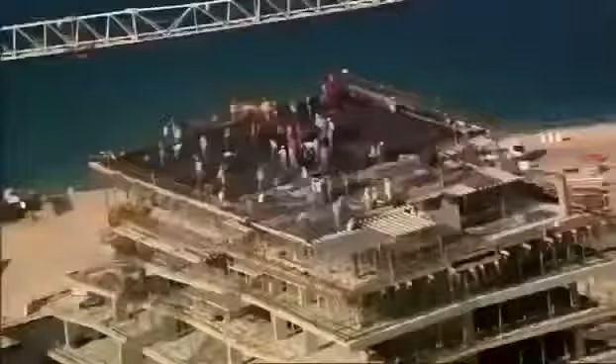Abu Dhabi, the richest city on the planet. It wants to join the City Super League and is undertaking an incredible transformation. Building this extraordinary skyscraper, Aldar HQ. Nothing like it has ever been attempted. It'll be a race against the clock. Will this megastructure push even Abu Dhabi to the limit?

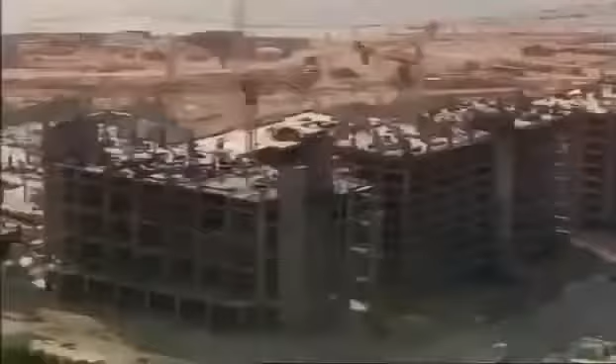Abu Dhabi is in the midst of a construction boom. It's the largest of 7 sheikdoms known as the United Arab Emirates. Its capital, also called Abu Dhabi, is the richest city on earth. Its ruler, Sheikh Khalifa, has a cool $875 billion in the bank and an audacious spending strategy to match. He wants to transform the skyline and compete with the international elite of London, New York, and Hong Kong.

But this is not the first time the Emirate has stood at the crossroads. Just decades ago, Abu Dhabi was a desert backwater, until the discovery of oil in 1958 brought unimaginable riches to its ruler, Sheikh Zayed. As the petrodollars flowed in, he converted the shell houses into high-rise, and the traditional way of life was swept away.

Today, Abu Dhabi is a thriving metropolis, sitting atop the world's 5th largest oil reserve. But black gold alone cannot put this city in the Super League. To do that, Sheikh Khalifa must lure big business and tourist dollars. Abu Dhabi must expand to thrive.

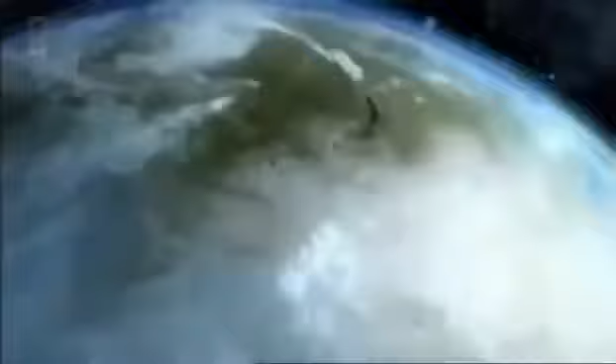To put Abu Dhabi on the world map, fledgling property developers Aldar plan a whole new micro-city, Al Raha Beach. It's an ambitious proposal. At 11 kilometers long and almost a kilometer wide, this city on the sea will be the biggest project ever attempted in Abu Dhabi's history. Mohammed Al Mubarak is in charge of delivering this audacious development. The vision of their highnesses and the vision of Aldar was to create this almost mini city where people can live, study, play, and work in one destination.

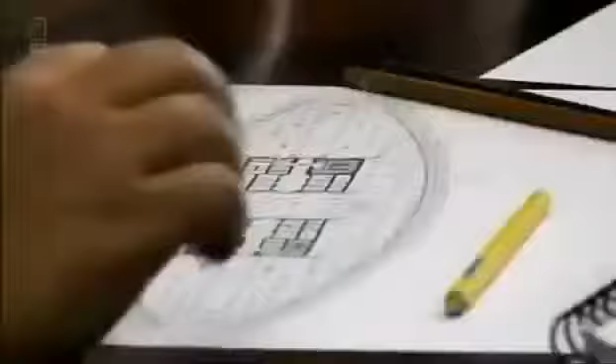Al Mubarak must attract investors if Al Raha Beach is to succeed. So to launch the project, he commissions a signature skyscraper. Creating an iconic structure on Al Raha Beach was of vast importance in basically putting Al Raha Beach on the world map. Al Mubarak sets Lebanese architect Marwan Zgheib the task of designing an icon that raises the stakes even higher. The building will become Aldar's headquarters in the heart of their colossal development.

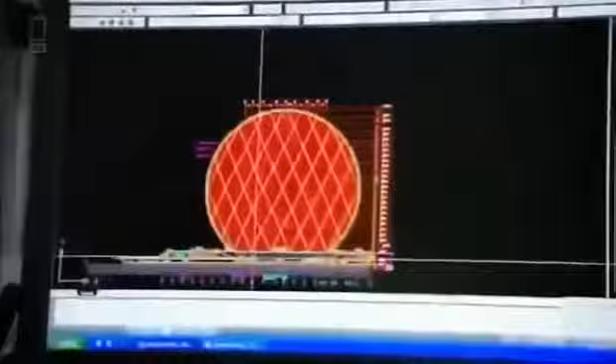But creating something new in a land where the iconic is the everyday won't be easy. Neighboring Emirate Dubai has taken center stage with a number of headline-hitting projects. The world's tallest skyscraper, Burj Khalifa, the Palm, and the World, and the emblematic Burj Al Arab. To stand out from the crowd, Zgheib knows he must redefine the extraordinary. Simple can be powerful sometimes, and especially in architecture. You can see it since the pyramids of Egypt. Most of the iconic buildings are very simple buildings.

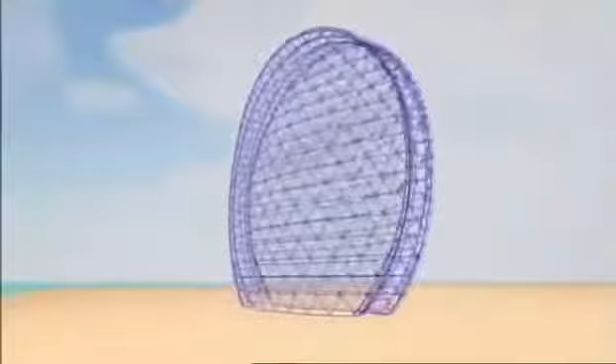But it isn't until Zgheib is relaxing on a plane that he has a brainwave. But I couldn't sleep, so it was a moment of relaxation, you know. And then the idea came simply. So I took a pen and I drew it on a sketchbook. The design is simple but daring. A round skyscraper taller than the Statue of Liberty, with a curved glass skin covering the area of 4 football fields. To be honest with you, the moment I imagined it, I knew it was a winning concept. I knew it was something different.

In fact, the design is so unusual, Al Mubarak initially doesn't know how to react. When I first looked at the MZ design, I was a bit confused in the beginning, to be honest with you. I felt like I was looking at a comic. I felt that this was a flying saucer and basically it landed on Al Raha Beach. And I just kept on staring at it for like another 15 minutes. And after 15 minutes, I just fell in love with it.

Zgheib's design is inspired by nature. 2 giant circular curved walls of glass mirror an open clamshell. Architecture is nothing but imitation of nature. At the beginning, the idea was so geometrical, very pure. It's like a seashell. The seashell has deep meaning for Abu Dhabi with its seafaring heritage.

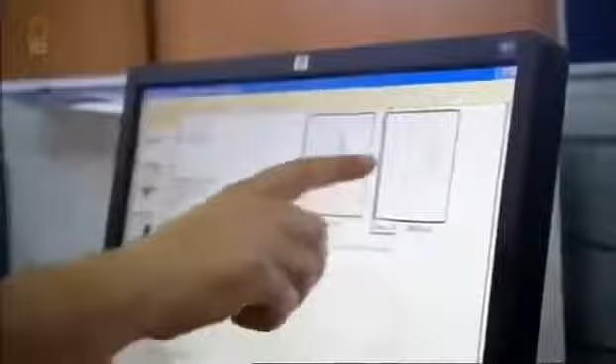But a circular design poses a problem. Just like a coin that stands on its edge, it risks being unstable. The circle must be balanced. So Zgheib turns to some very old-school geometry. The real challenge of the circular facade was to find the 2 points where the building should pose on the ground. And for that, I had to go back to one of the oldest rules in architecture, proportion. When you have a circle, you can divide it into a pentagram.

And that pentagram, in fact, is a representation of the cosmic body of the human being. So you can put a man in that pentagram, the man and the universe. So the pentagram will define the 2 points of the circle where the facade will lay on the ground. And this will create the perfect balance.

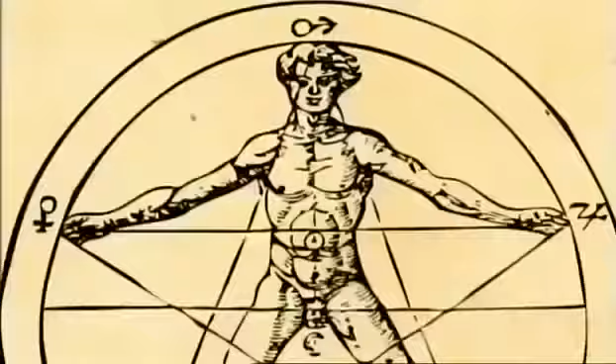It was the same thinking that led 16th century philosopher Heinrich Agrippa to draw man as a pentagram inside a circle, and has helped architects to proportion buildings for centuries. But it's not the skyscraper itself that poses the first major challenge. It's the proposed site. They wanted to show me the site, but all you can see was the sea, nothing but the water.

Unbelievably, the solid ground required for Aldar HQ does not yet exist. The desired location is 700 meters out in the Persian Gulf and 8 meters underwater. New land must be created. Over 3 million cubic meters of sand must be found. Surely a simple task with Abu Dhabi's endless desert dunes. But desert sands are too fine to build with. The land would just slide into the sea. Marine sand is needed. Its larger grains help it stick together, creating the perfect base to build on.

Dredging sand from the seabed is one solution, but fortunately, the late sheikh has already done the job for them. Whilst cutting a shipping channel in the late 1970s, Sheikh Zayed created an island of discarded sand. Luckily for the engineers, it's just across the water, so they decide to move all 20 million cubic meters of it.

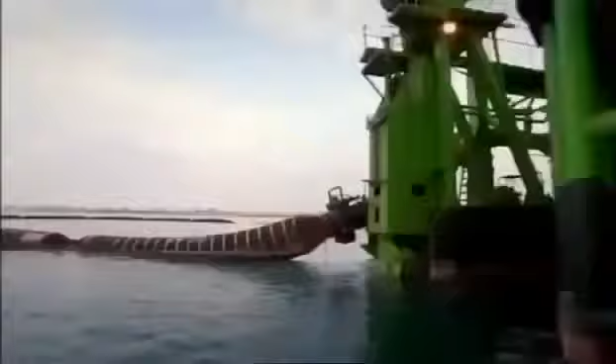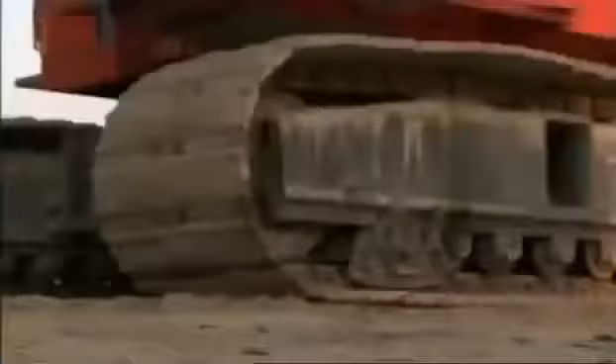A fleet of cutter dredgers eat their way into the island. These are no ordinary dredgers. It takes an enormous claw layered with 48 reinforced steel teeth to slice through the hardened sand. The sand is pumped through a floating pipe to the construction site. Here, excavators toil 24 hours a day to flatten the virgin ground. After 8 months, the land for Aldar HQ is fully formed, and with this, the first major problem overcome.

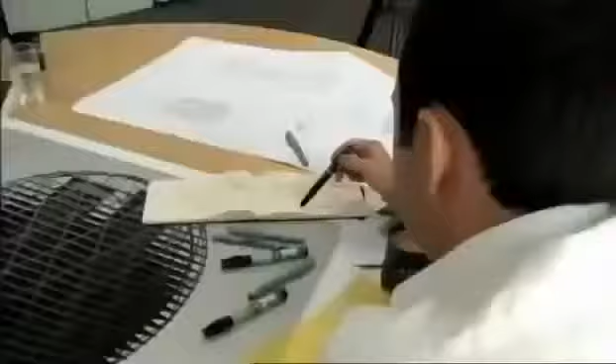Aldar want their skyscraper completed by an astonishing deadline. In just 30 months' time, the eyes of the world will be on Abu Dhabi when it hosts its first Formula One Grand Prix. The racetrack will be on its own designated island, complete with hotels and theme parks. And Aldar are building the lot. The international press and tens of thousands of visitors will descend on the city. It's the ideal opportunity for Aldar to showcase their new HQ. But to stand any chance of meeting this target, the team will have to pull out all the stops.

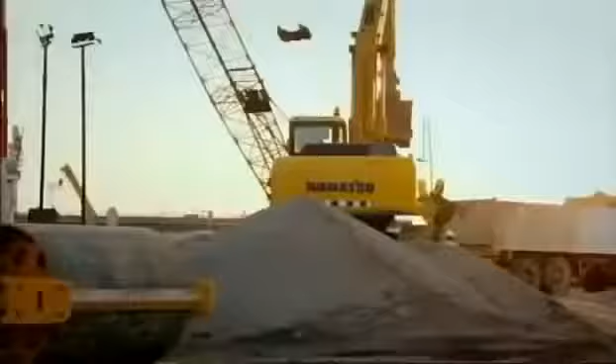Just 1 month after design has started on Abu Dhabi's round skyscraper, the construction team arrive on site to begin foundation works. For construction manager Miles O'Sullivan, the schedule is a shock. With the design not complete and being told you're going to pile in 1 month, almost crazy. But it's not just the first deadline O'Sullivan has to worry about. Aldar HQ's round curved shape presents an enormous sail-like area when wind strikes. Wind tunnel tests must be done to prove the foundations can take the strain. But the results won't be back until work has already started.

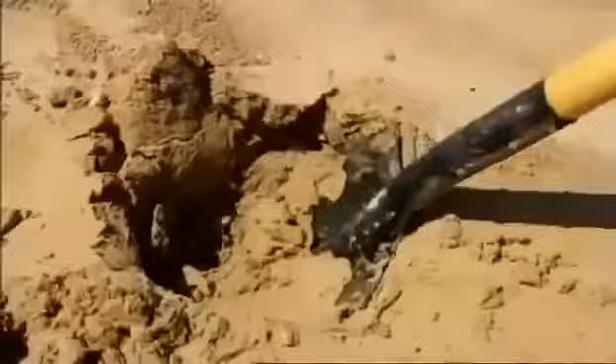Abu Dhabi is regularly hit by high-pressure winds that sweep in from the Persian Gulf. But building Aldar HQ so close to the sea will put the foundations under another kind of pressure. Digging for Aldar HQ is very similar to digging here in the sand. As you dig down, you'll get to see the groundwater starting to surge through the sand. And in fact, it's that groundwater coming through the sand here that's creating the pressure and obviously creating the issues for us when we do the construction. The upward pressure of the water and the loose sand pose a problem for foundation construction.

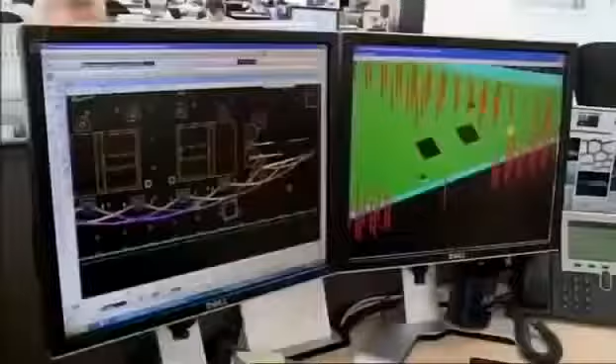Before excavation can begin, the team must build a solid barrier called a diaphragm wall or D-wall. It's a concrete barricade formed of interlocking panels which socket into the bedrock and reach 16 meters below the surface. The D-wall holds back the loose sand and the surging seawater, ensuring the ground inside the barrier can be removed. These areas here, what are these? Sumps. The D-wall must be built before the foundations can be laid. But with the blueprint still a work in progress, the team can only hope that over-engineering the foundations will make them strong enough.

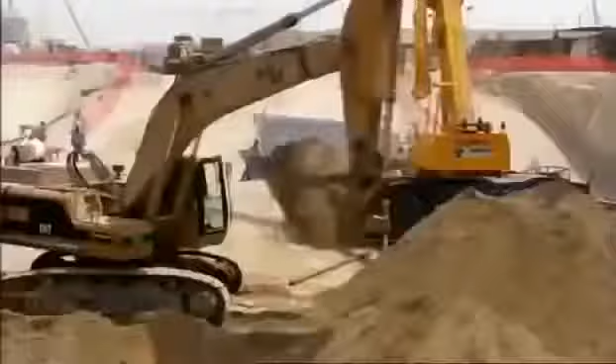The design calls for about 400 concrete piles that work in two ways. Half of the piles rely on friction with the ground to secure the structure to the rock and sand below, whilst the remaining piles drive deeper into the rock to dissipate the building's immense loads into the ground. On site, D-wall construction begins. It's the same process ongoing at this Abu Dhabi construction site.

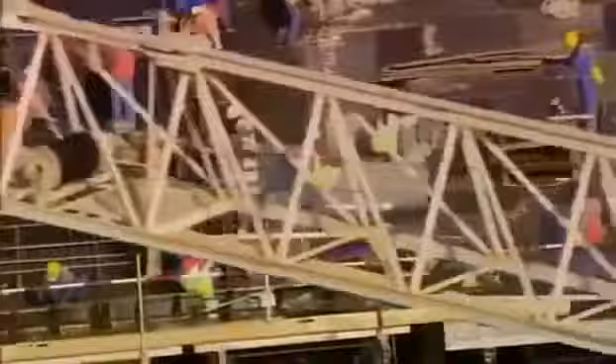Until recently, Al Raha Beach was just a vision for Aldar's Mohammed Al Mubarak, but the dream is slowly emerging from the sea. Seeing that land come up, seeing the amount of work and the amount of staff we had on the ground to make sure that was going to be done, that was like watching Rome being built.

The D-wall and concrete piles create a firm foundation upon which to build Aldar HQ. But the force of the sea pushing up through the sand still poses a threat to the skyscraper. A great way of demonstrating the problems we faced at Aldar HQ with the groundwater is in imagining that this bottle here is Aldar HQ.

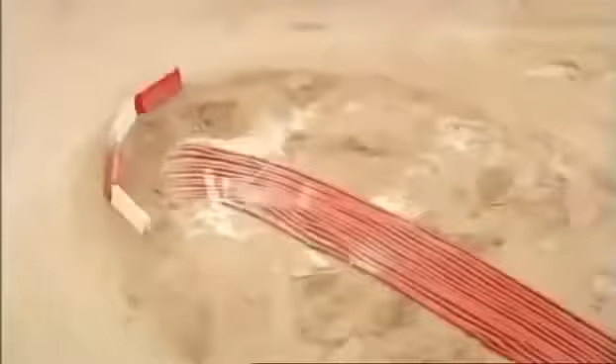And as I push the bottle down, you'll see forces are exerted on my hand. And in fact, that's the groundwater trying to push the building out, trying to push Aldar HQ out of the building site. To keep the site dry during construction, water is sucked out of the sand and pumped out to sea. But that's only a short-term solution. To protect this skyscraper in the long term, the team need an extra defense.

It's a giant slab of concrete called a raft. It creates a barrier against surging water, stops the piles from punching up through the building, and acts like a snowshoe to evenly distribute Aldar HQ's 59,000-ton weight into the ground. Raft construction for Aldar HQ is 12,000 cubic metres of concrete, which is a 30,000-ton structure. It's a huge element. With 2,000 truckloads of concrete to pour, it's a job that continues into the night.

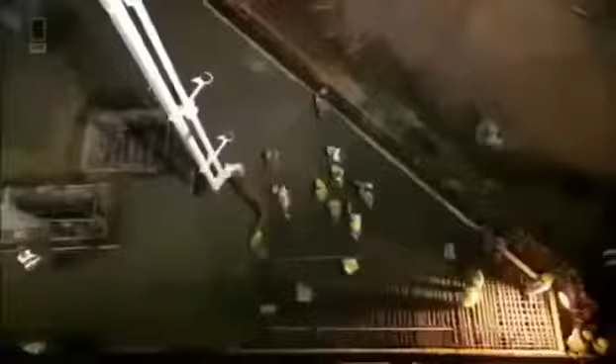But engineers are just getting to grips with the severe forces that will affect the piles. The unique shape of the skyscraper will capture wind like the sail of a yacht. There are no guarantees the foundations will be strong enough to cope with the loads. The advanced construction works had to commence so quickly that we didn't have time to do the wind tunnel test. It was important that we did one, primarily because this is a unique shaped building.

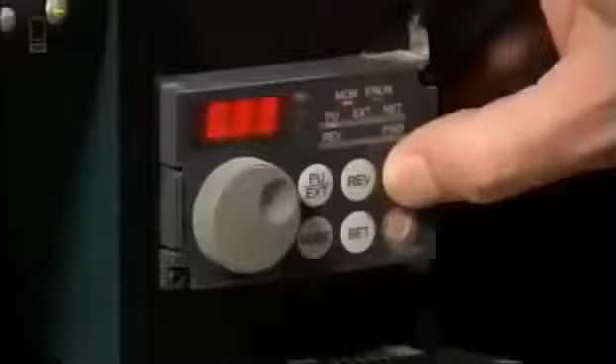Gibbons calls upon wind engineer Roy Denoon in Colorado, USA. He puts a scale model of the HQ through its paces in his high-tech wind tunnel. Right at the start, Craig Gibbons actually called me and said, "We've got something really unusual coming up. Can you take a look at it and give us your first best guess of what the wind loads might be? Give us some guidance on how to get to some loads for the foundations, because this is running on such a fast-track schedule."

Knowing that Gibbons is already building the foundations, Denoon wastes no time in firing up the fans. If the tests reveal the wind loads are higher than predicted, the foundations already in the ground may have to be redesigned. To be putting in the foundations before we could finish the wind tunnel testing, that always gives us a little bit of cause for concern. Denoon is right to be worried. He knows how high-altitude wind impacts on very tall rectangular skyscrapers. But Aldar HQ's lower height means another type of wind is the threat.

When we look at the really extreme wind speeds in the Middle East and in this region, we find that the highest, what we call gust wind speeds, the short events, are caused by thunderstorms. Abu Dhabi may appear sun-soaked, but during the spring, the intense sun heats the moist air, causing spectacular thunderstorms. Wind speeds can escalate up to 137 kilometers per hour.

The key issue with thunderstorms in this region is that they give the absolute highest gust wind speeds. Now, for the very, very tall buildings, that's not too critical because they occur down low. For Aldar HQ, they were really critical. Thunderstorm winds are strongest between 50 and 150 meters above ground. Aldar HQ is right in the danger zone.

In advance of getting the wind tunnel test, we'd speak a lot with the wind tunnel engineer, Roy Denoon. And Roy would wind me up about the kind of loads he was getting, knowing that the piles were going in as we spoke. Wind hitting Aldar HQ's sail-shaped facade puts the building's narrow base under pressure. The wind wants to twist the structure. The foundations must be strong enough to resist these forces.

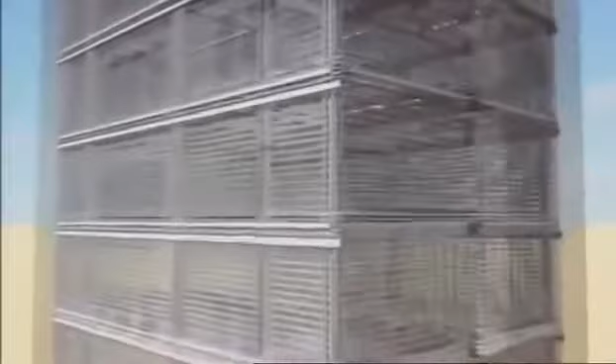The results of the wind tunnel test are great news, but the relief is short-lived. Now the structure needs a super strong backbone or core. But again, conventional building won't fly with this design. For Aldar HQ, one core wasn't enough. We needed 2 cores, in fact, to take all the loads down into the structure. Aldar HQ needs 2 concrete cores for extra stability. The twin spines rise a full 125 meters from the concrete slab to level 23. Reinforced with 6,500 tons of steel, these cores will transfer the loads into the piles. But to channel these forces safely, the concrete must be cast without any flaws.

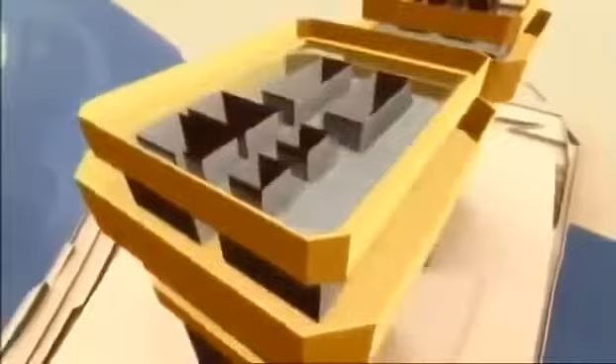They need a way to build the cores as 2 single pieces of concrete. The answer? To slip form. It's a clever way to build big concrete towers. Liquid concrete is poured into a giant mold, which forms the shape of the structure. The mold slowly climbs up the core as it's cast, forming a single concrete tower without any joins. Seamless concrete will ensure the HQ's cores are strong. But these 125-meter backbones must be built in only 6 months.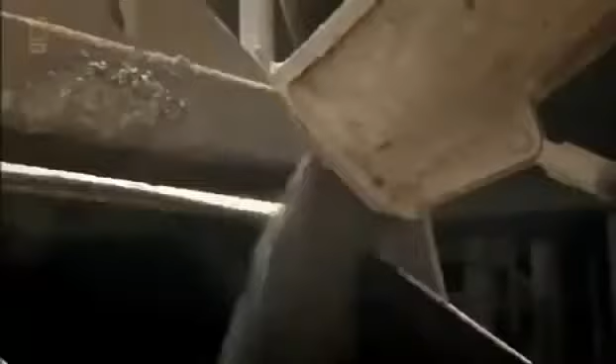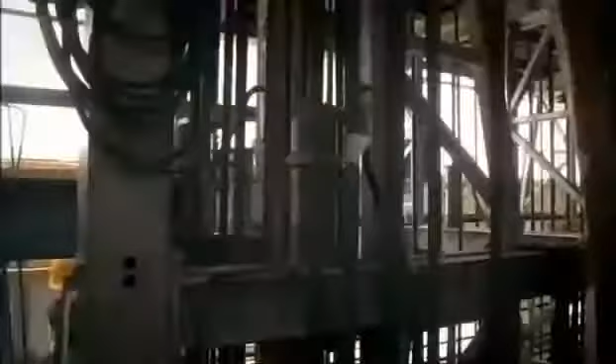It's the same process ongoing at this Abu Dhabi construction site, led by the Aldar HQ team. We are calculating how much per hour we need to climb, and then how much concrete we need to place in every hour. Slip form is fast, but on this schedule it's not fast enough. O'Sullivan has a trick up his sleeve to speed up construction. We set a challenge to both cores, who could get up there first. The teams battle to reach each level before the other. The cores grow meter by meter under a constant cycle. The concrete is released and poured around the steel reinforcement. Hydraulics anchored to the structure raise the mold or shutter so that the next layer of concrete can be poured.

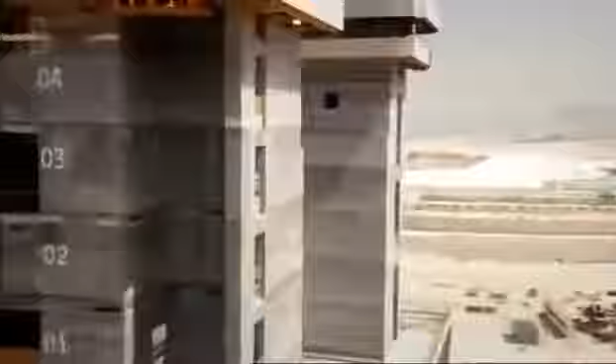The manpower is a key focus because slip forms are very labour intensive. You need to make sure that the guys are on deck, they're there at the right time, they're doing the right works. 4 months into core construction, the 2 teams are neck and neck in the race to the top. Core 1's team leader keeps a close eye on Core 2's height. It's been my benchmark, so if I'm doing better, I'll be ahead of them. There are a lot of pressures. My boss is telling me, do this, go up, go up, go up. But it's good, the pressure is good. Core 2's leader also feels the strain. I'm working 24 hours today. I try to finish earlier than the other core. Every month, the builders pour enough concrete to fill 1.5 Olympic swimming pools.

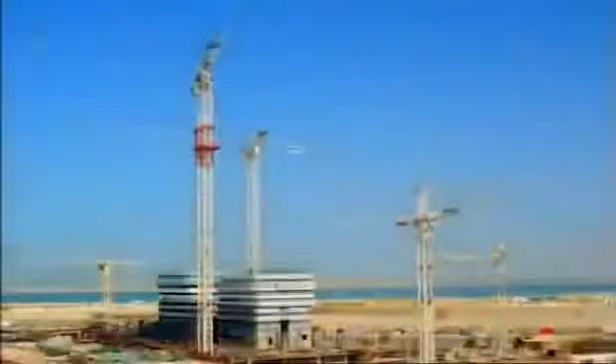But the teams aren't home and dry yet. There's still a challenge to finishing. Cores are renowned for going up quickly and sometimes having problems, so there's a lot of coordination effort that goes in to make sure that they do go up on time. We had structural steel elements to cast in. We had crane connections to get right. After just 6 months, the 2 cores are approaching the top. Core 2 is only a meter or so behind, but Core 1 push ahead to victory. Core 1 won the race. It's really good to know that we're on top.

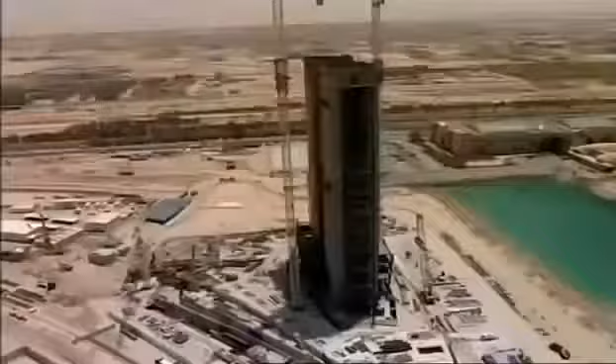For O'Sullivan, the contest to build the cores in record time has paid off. A lot of planning goes into the cores. To see it come off, a fantastic feeling. But it's only a stepping stone, the core construction. There's a lot more to go on. The team have so far overcome the obstacles to bring Aldar HQ to life. But now they must face their most complex challenge to date. 1 year in, and Abu Dhabi's radical skyscraper is beginning to take shape. But with only 19 months to the deadline, the engineers must crack how to build Aldar HQ's vast external shell.

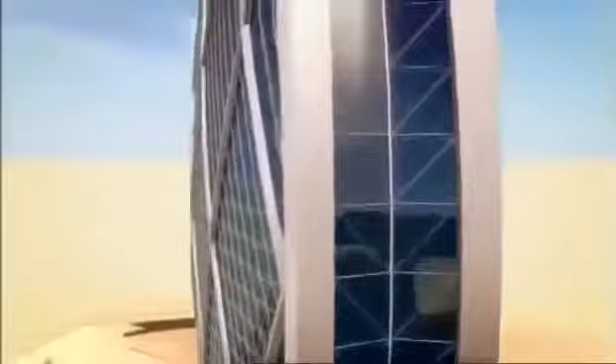The design demands a heavyweight shell to support its wide girth and survive huge wind loads. But the architect stipulates open office space, floor-to-ceiling windows, and panoramic views of the Persian Gulf. In the United Arab Emirates, the shells of rectangular skyscrapers are built with concrete. But the geometry of Aldar HQ's shell is so complex, it must be built with the precision of a Swiss watch to fit together. On this scale, achieving millimeter accuracy with concrete is practically impossible.

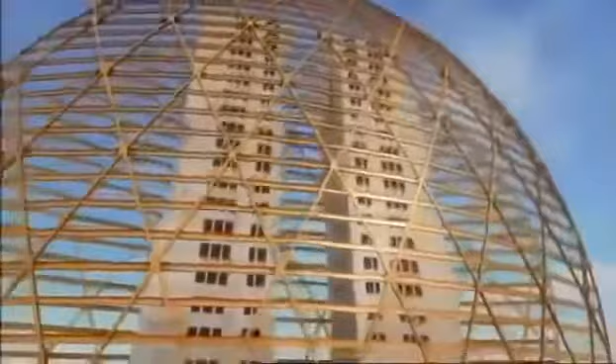The answer? A specialized steel exoskeleton called a diagrid. It's a muscular but slender steel frame that will form the HQ's unique shape and will channel forces through its high-strength beams and joints into the cores. Steel is very strong as a single element, but meshing them all together gives us this added strength and also allows us to make these rather unusual shapes.

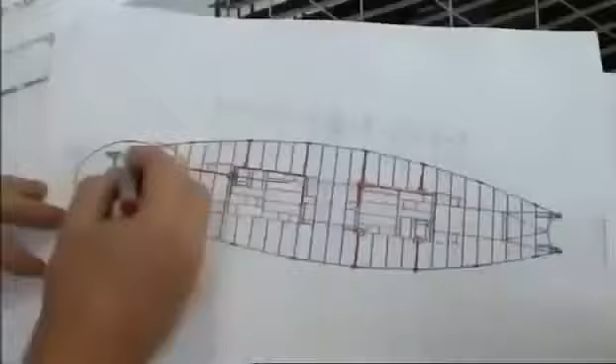The steel exoskeleton should make the architect's vision possible, but it'll be a first for the United Arab Emirates. Constructing a skyscraper like this will be a step into the unknown. The geometry of the building presented a significant challenge to us, but the other challenge was that a diagrid building, or buildings using this diagrid system, had never been built before in Abu Dhabi and the UAE. Let's have a look at it if you don't mind.

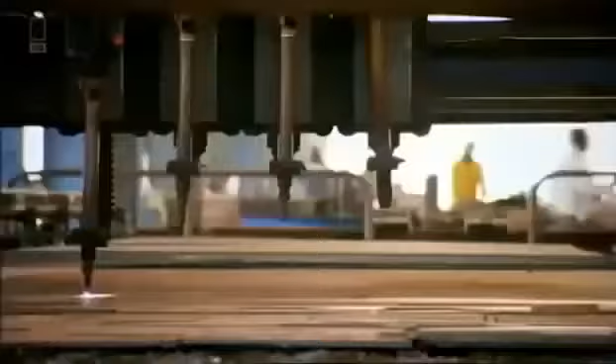It'll take expert steel fabricators to pull this job off. When we first saw the design, it was something that we knew we had to put our most experienced guys on. The structure's very, very complex. The army of fabricators work in shifts around the clock to cut and weld 2,500 tons of steel. The factory is building a series of A-shaped steel sections, weighing up to 30 tons each. They will connect together to form the structure's signature curves.

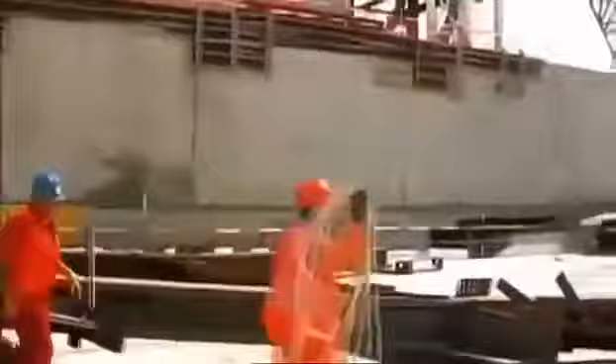But if manufacturing these giant A-frames is not a big enough job, lifting them into position on site will be a major challenge. Great to see the steel arrive for the main diagrids, the main columns to the structure. Huge sections. The thought of actually starting the steelwork some 18 months after we started the job, fantastic.

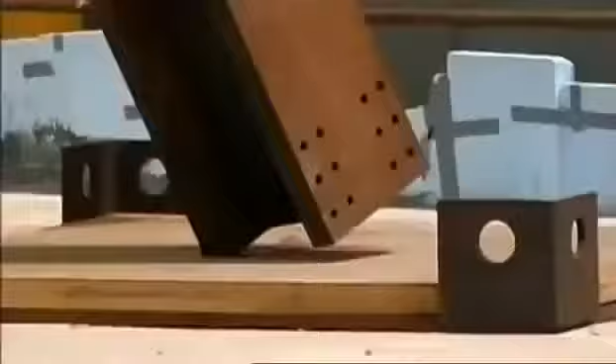But excitement of the first A-frame delivery is soon replaced with trepidation. Lifting these monsters will be a precision job, and tensions run high. When we rigged the first A-frame up, you've got to put all the chains on it. It would take maybe an hour to rig it up, and everybody's then thinking, I hope this is going to work. Everyone is on tenterhooks. Now is the moment of truth.

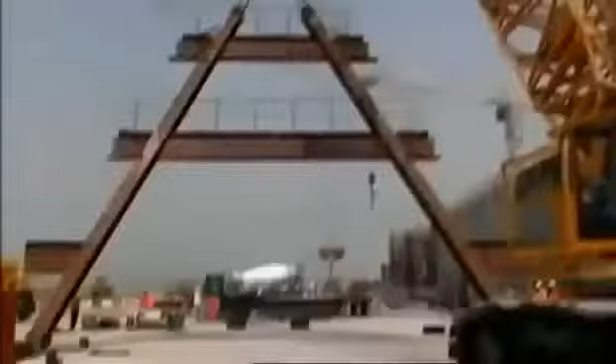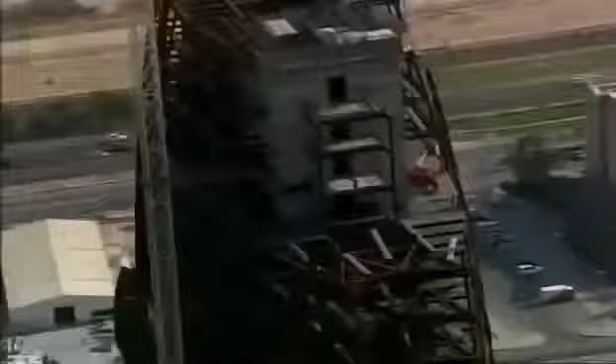The A-frame is lifted off the ground. There was a big 'ah' from the crowd when it went in. The first exoskeleton section is finally bolted to the base plate. To see one go in, an amazing feeling. First A-frame up, again a milestone achieved, but then a lot more to go. Another 99 A-frames must be fitted to form Abu Dhabi's unique skyscraper. The handover date is now just 19 months away.

So the team must now focus on the HQ's interior. The structure needs an alarming number of restrooms, 85 in total. This is no weekend DIY job. It'd take an army of plumbers and time the schedule cannot spare. So to fast-track the task, the team innovate again with prefabricated washroom modules, or pods. A pod is a factory-made restroom, complete with lavatories, basins and mirrors, ready to plug into the building. The team plan to lift these 12-ton pods by crane and lower them into the cores like a giant game of Tetris.

Construction is a finely tuned sequence. The pods have to be in before the exoskeleton blocks access to the cores. Aldar must approve the design fast, but there's a problem. We produced a lot of visuals and graphics which we had signed off. Then we actually built the pod. We went to look at it at the factory and a lot of people thought that's it. But Aldar unexpectedly rejects the pod design. It's just too ordinary for such a futuristic skyscraper.

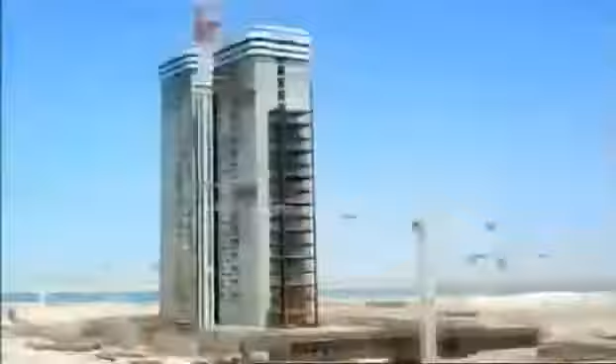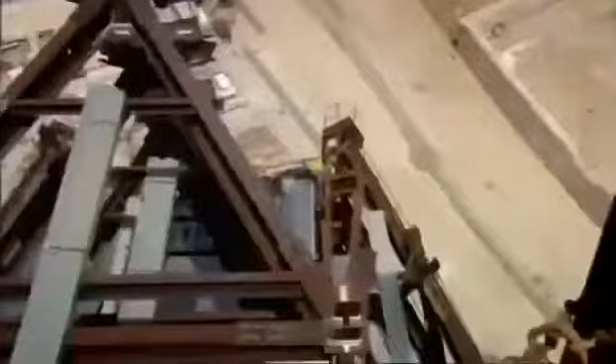It will take months to remodel, and the exoskeleton can't wait. The whole plan could go down the pan. The only option is to leave out two roof sections and drop in the pods later, but this has its own dangers. With zero hour looming, the team must now wrap the building's skeleton with a glass skin. And no one has ever built a glass facade like it.

The geometry of Aldar HQ is highly complex. 2 giant bowed facades cover an area the size of 52 basketball courts. A 3rd narrow surface joins the round facades like a zipper, arcing an extreme 290 degrees from one side to the other. But curved glass like this doesn't exist. The engineers need another plan.

The secret to covering a curved surface with flat glass is its shape. Square glass isn't an option. Squares can only bend in one direction at a time without distorting. Aldar HQ needs triangles. They can pivot on 3 axes and seamlessly join with their neighbors. To form these complex curves, it'll take 25,000 individual panes.

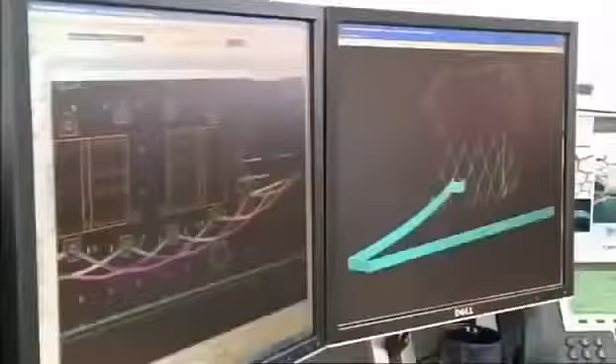But before glass production can begin, the team must know what wind pressures it will face. It's back to wind engineer Roy Danoon, who must test the design in his wind tunnel. When we first saw the design, we knew there was some potential for some quite high glass design pressures. If you under-design a pane of glass, then it will be sucked out the building. The large facades are most likely to cause trouble.

The biggest loads on the overall building are the winds coming flat into the wide face, so it's capturing it almost like a sail. The wind comes into the centre and spreads out around the building, and where it separates and splits away from the building around the edges, that's where we see the largest pressures. The pressure is like a big SUV hanging off the outside of each panel.

But that's not all Danoon's test reveals. The circular shape of Aldar HQ creates another problem. When we initially saw the design, the sharp edges threw up this warning flag that said, look, we can get some pretty large pressures here. Where the wind hits the edge of the narrow strip of glass, it spirals in on itself, creating a vortex.

You see this recirculation of the flow. It separates away, and you get this little bubble on the surface where the wind isn't hitting, and then it comes back in to meet the surface again. That's typically an indication that that's where your highest design loads are occurring for your glass. And that's very, very strong suction force is what that little bubble means. To stop wind sucking glass out of the HQ, each pane must be beefed up with thicker glass and a stronger frame.

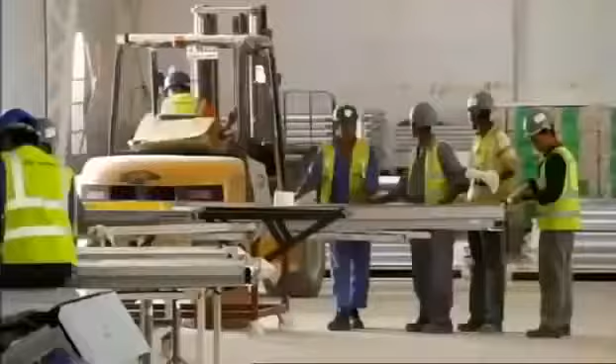But that does nothing to limit the scale of the job ahead: installation. You talk about 25,000 pieces of glass. To do that for the building in 10 months, it's a monumental effort. It's a constant battle, making sure that you get the glass to site. But having the glass factory on site is a lifesaver.

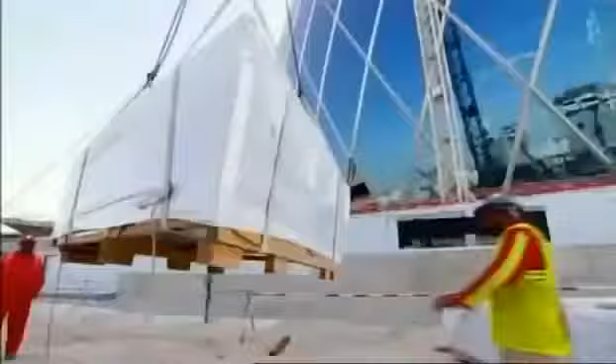It made it easier for the site to actually call up on glass. Once they are installing the panel, they ran out of glass, we're immediately on the phone. Hey, we need more panels over there, so we got them on a truck, and 5-10 minutes later they were on the site. The glass factory sends the panels to the site by truck, and the panels are lifted by crane up to the installation team.

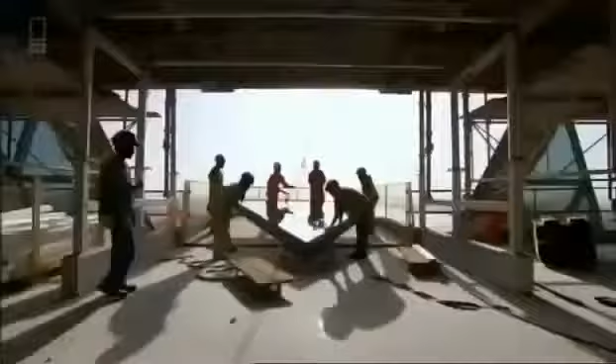The constant pressure was the program. The glass is pulled onto the floor plate, but it takes a team of 8 specialist riggers to install the panels. Probably the hardest thing was the sheer volume that had to be installed. Fixing glass on a curve at this height means the panels have to be swung out from a platform that hangs out of the building.

It should be easy, but then this team have Abu Dhabi's wind to contend with. The wind here can just blow in from nowhere. It caused us no end of problems. The glass would start to revolve and spin. We would get a choice whether to lift it, bring it into the building, put it down, or to put it straight back down on the ground. They were decisions that had to be made on the spot.

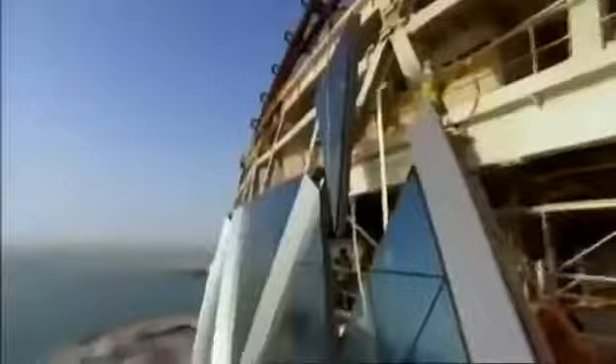And you don't want a large panel coming down from 20 stories. Just contemplating that, it doesn't bear thinking about. This glass panel makes it into position in one piece. But the team have another 29 to install every day if they're to meet their targets. We got it up to 30, 32 on average, and I think the best day was over 40.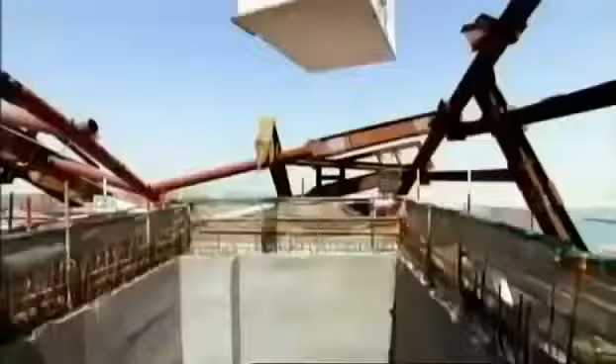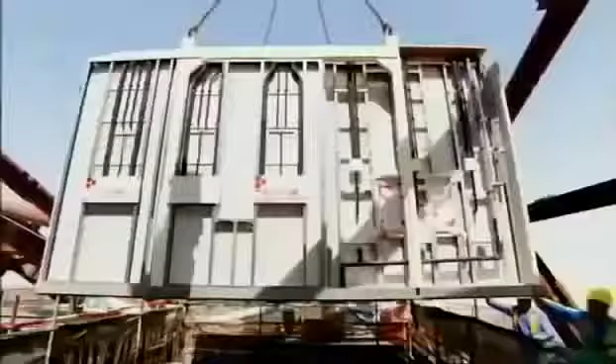The pod drops are quite quick. We hook them up, we take them up the 140 metres to the top of the tower crane. The pod can now be lowered into the core shaft. It's a tight fit with just 75 millimetres of clearance. When I saw the first pods in, it was a relief that that saga was over and we'd actually managed to achieve what the client wants.

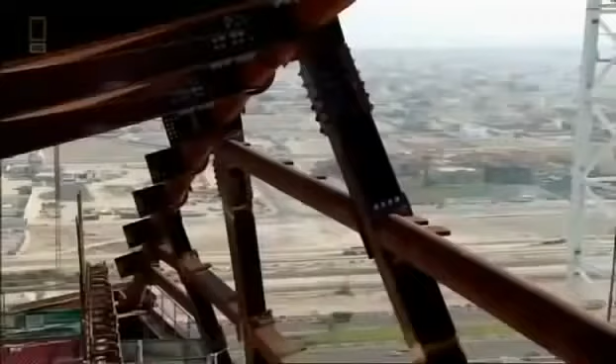The pods are on the move, but the long delay has serious consequences. Finishing the exoskeleton should be a straightforward task, but the incomplete steel roof has sagged out of shape.

Eight months from the deadline, and the world's first circular skyscraper is fast approaching completion. But with the end in sight, construction hits a serious snag. The delay in fitting the washrooms into the cores has forced the team to leave the roof arch open, causing the steel to slouch out of shape.

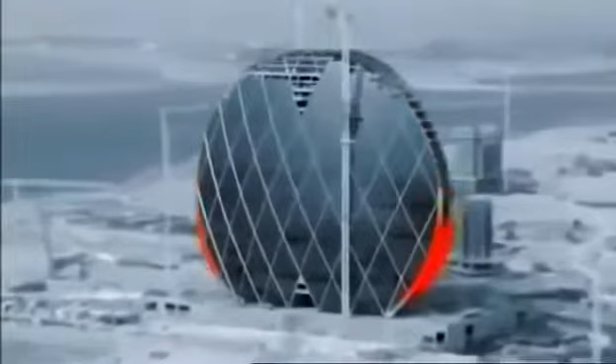The arch of the HQ's lightweight roof is the key to its strength. Its curves evenly distribute the forces down into the foundations. But if any elements of the arch are missing, the forces cannot flow away. The roof will sag under the weight.

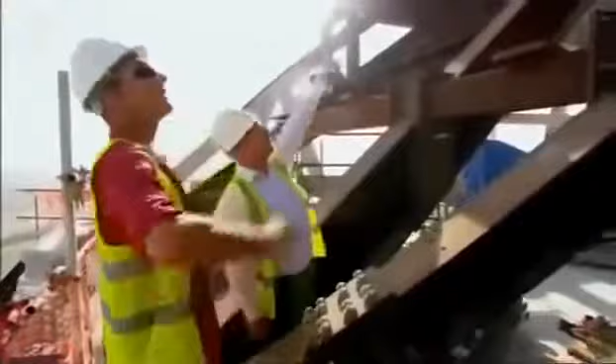To discover how serious the slump is, the steel is surveyed. I made a phone call to our site supervisor, Bob, and asked the question of what the actual sag was recorded, expecting it to be around about 50, 60 mil. When we got the figures of 150 millimetres, I was a little bit shocked.

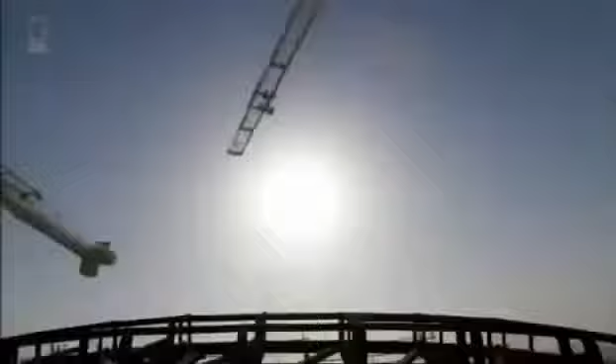With a building that relies on precision engineering, a 150mm sag is a huge problem. The roof will not slot together. The brackets to connect the remaining 40 glass panels will be out of alignment. There is no time to redesign. The team have to somehow make the roof steel fit together. The only way is to lift the entire roof into position, and it weighs a staggering 200 tons.

Even for experienced steel engineer Bob McPhee, this is a serious undertaking. I hate it when you start waking up thinking about your work. I've never liked to do that.

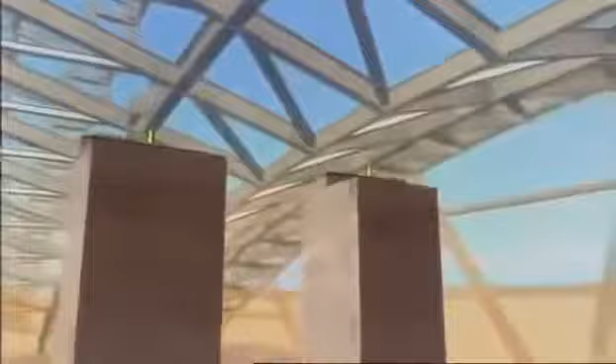To lift the roof arch, 2 hydraulic jacks are positioned on top of a load-bearing wall, carrying 80 tons of weight into the core. 2 more jacks are propped with 16-meter-tall steel columns and channel 40 tons each into the concrete floor of level 23. The props are packed with steel slabs to hold the roof in position as the jacks are raised.

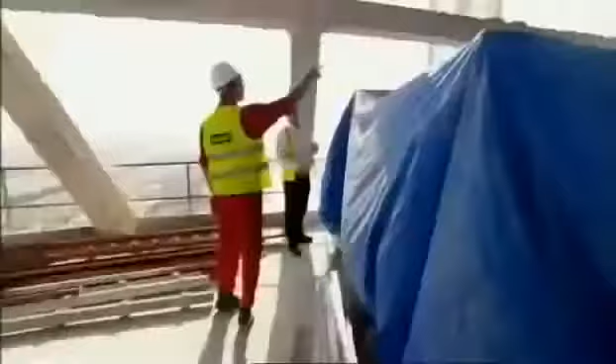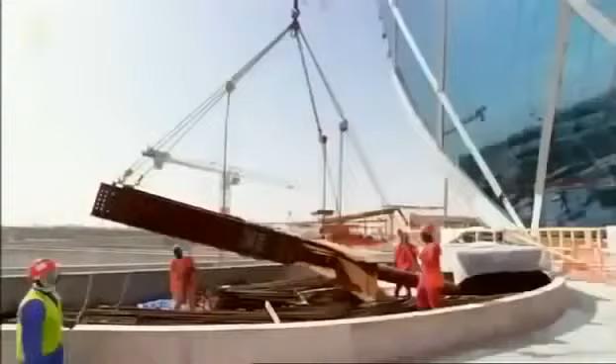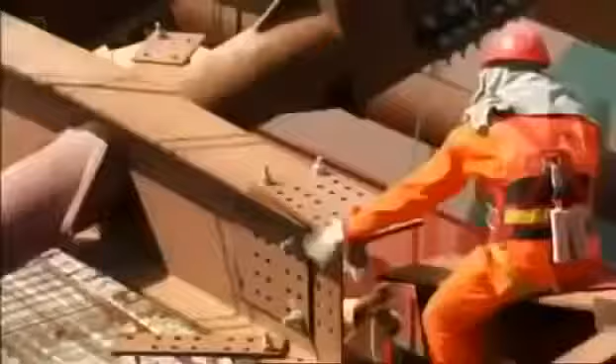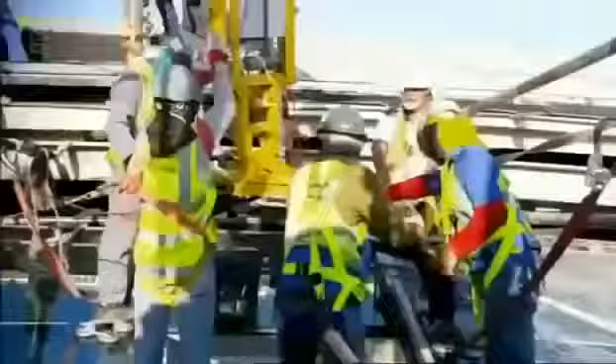With just weeks to spare before Abu Dhabi's first Formula One motor racing spectacle hits town, all of Aldar HQ's 25,000 glass triangles are in position, except one. The glass installation team lower the pane inch by inch. No one wants to be responsible for shattering the last sheet of glass. It's a defining moment for the team. Finally, the last pane slots into place.

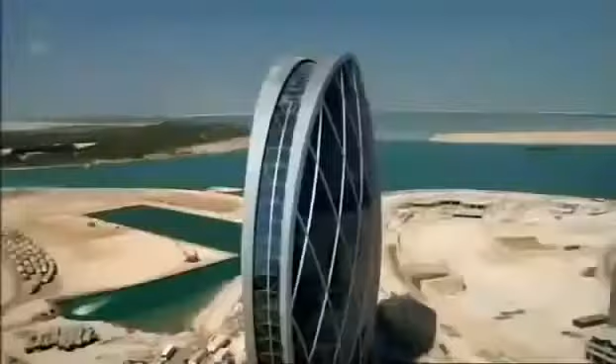Amazing structure. You don't see any circles in the world being constructed, so to be part of that was fantastic. Mindful of all the issues and challenges and highs and lows in between adds to that feeling of triumph.

Mohammed Al-Mubarak fell in love with an extraordinary idea. But will the building match his high expectations? It is really a work of art. It's a stunning building. To me, it feels like it should be in a museum. The space is unbelievable. It's really a colossal building. When you come up front to it, it's even bigger than you even imagined. And for it to come from paper to that, it's great.

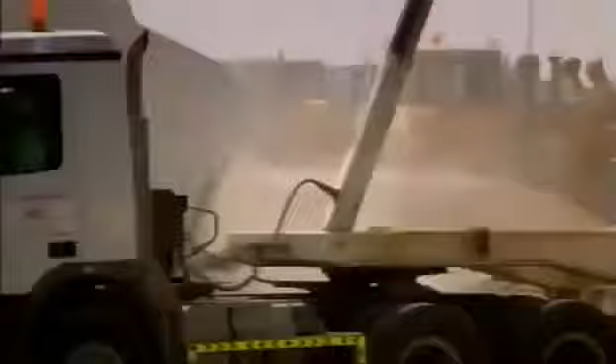Already an icon on the Abu Dhabi skyline, Aldar HQ should lay solid foundations for the future of Al Raha Beach. Architect Marwan Zgheib is delighted to see his concept sketch come to life. The building is more beautiful than the original idea because it's real now. It's no longer a simple concept.

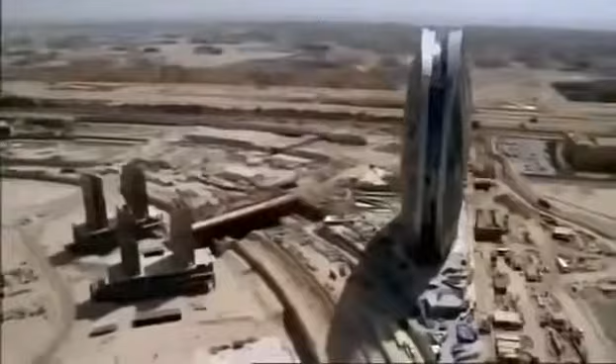It's become reality. Aldar HQ is a structure that rivals not just Dubai's iconic buildings, but can stand proud on the international stage. The HQ building has really put Abu Dhabi on the world map. If you ask me today, we're not yet into the world of Singapore or New York or Paris or London. Will we get there? I absolutely believe we will.